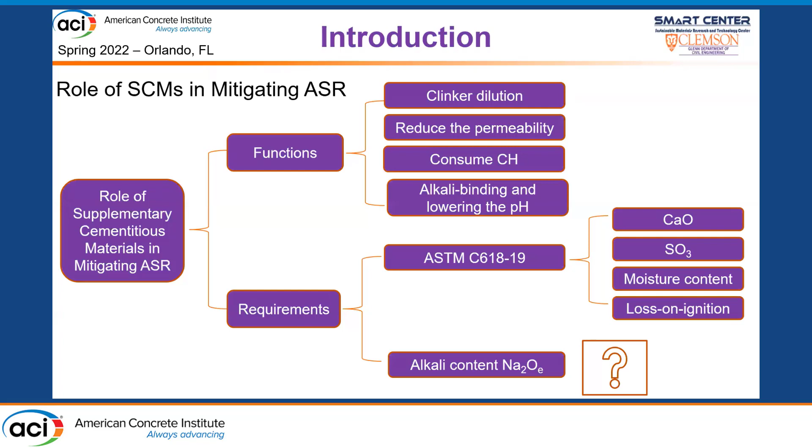ASTM C618 gives some requirements about the SCM used in concrete. The standard addresses the content of calcium oxide, sulfate, moisture content, and loss on ignition. But right now, there is no clear definition about the alkali content of SCM used in concrete.

Previous studies didn't recommend using such SCMs in concrete because they believed that if the SCM contains significant quantities of alkalis, these could also be released into the concrete pore solution, which would increase the challenge of controlling ASR. But the reason why we should investigate HANPs is that the demand for alternative SCMs in the concrete industry has increased significantly.

Generally, SCMs with total alkali content in excess of 3 to 4% are considered high alkali, but not all alkalis are available to participate in ASR. In the XRF data, the alkali content usually means the total alkali content, not the available alkali content. So it's important to distinguish the available alkalis from the total alkalis in the SCMs.

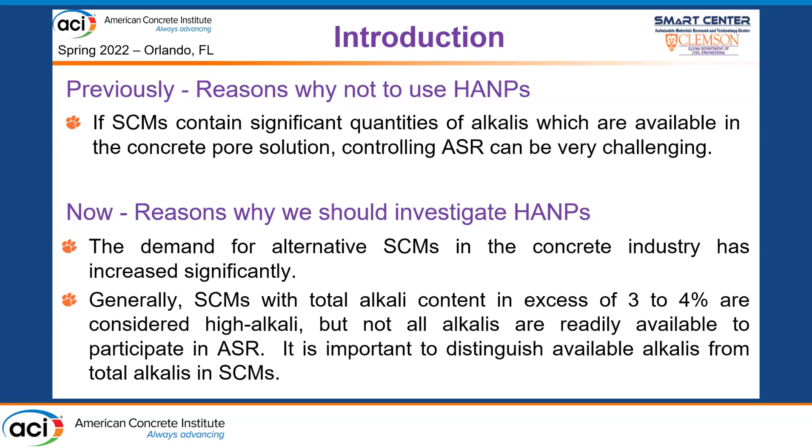So these are the three primary methods we used in our research: ASTM C1567, the accelerated mortar bar test; ASTM C1293, the concrete prism test; and AASHTO T380, the miniature concrete prism test. The three methods have different durations, sample sizes, materials, and exposure environments. Of course, the criteria for effective ASR mitigation are different.

For C1567, the average expansion of the samples should be less than 0.1% at 14 days. For C1293, the average expansion should be less than 0.04% at 2 years. For the MCPT, the expansion should be less than 0.02% at 56 days. After 56 days, we address the expansion rate, which should be less than 0.01% in 2 weeks between 56 days and 84 days.

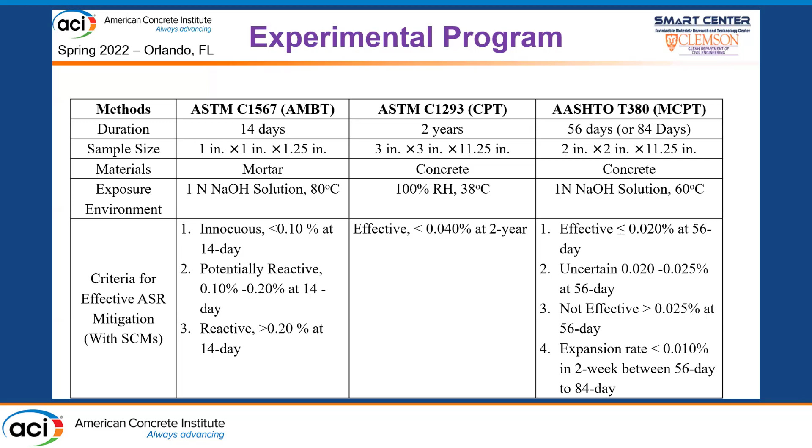The primary advantage of the MCPT compared to the CPT is that it's really short in time, because the CPT needs 2 years to get results. But for this method, we only need 56 days and 84 days to get results.

So this is the XRF data of the materials we are going to test in our research. We have 8 different materials. 2 of them are reclaimed fly ash, labeled NP2 and NP8. The alkali content in the red column is the total alkali content. I hope everyone can remember this value of the NP2 reclaimed fly ash at 4.74, which is the lowest value among all the materials.

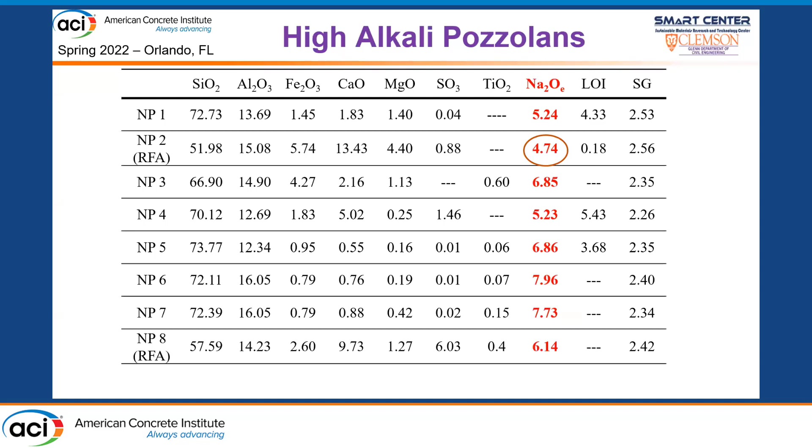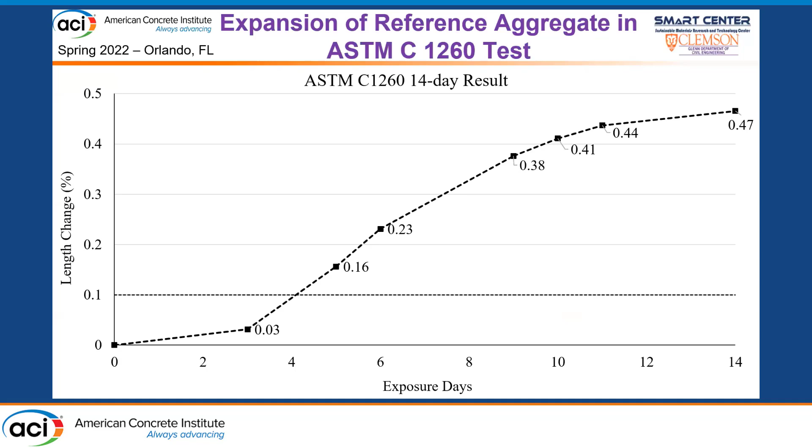So the first step of our research is to use ASTM C1260 to evaluate the reactivity of the aggregate we were going to use. At 14 days, the expansion had already reached 0.47%, which is very far away from the limit line at 0.1%, which proves this aggregate is very reactive for ASR.

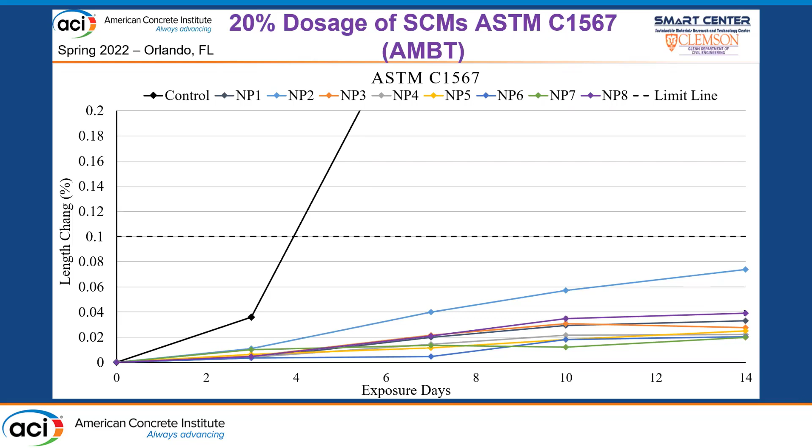And this is the result of a 20% replacement level of SCM in the C1567 AMBT test. In order to show the results properly, the y-axis bound is a little different from the previous figures. You can see the control black line is already out of the figure. All of the materials passed this test, but NP2 is the worst one compared to the rest of the groups, and it continues to expand at the 14th day. So this is the same replacement level in the C1293 test.

Different from the previous figure, the majority of the materials have already failed, except the NP6 and the NP5. Because the requirement for the 1293 is 2 years to get the final result, the test is still ongoing. The latest data we recorded is 1-year data. It still takes some time to get all the data.

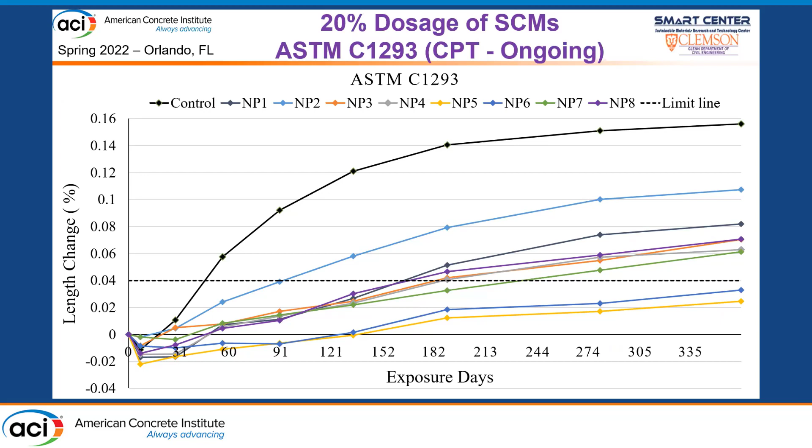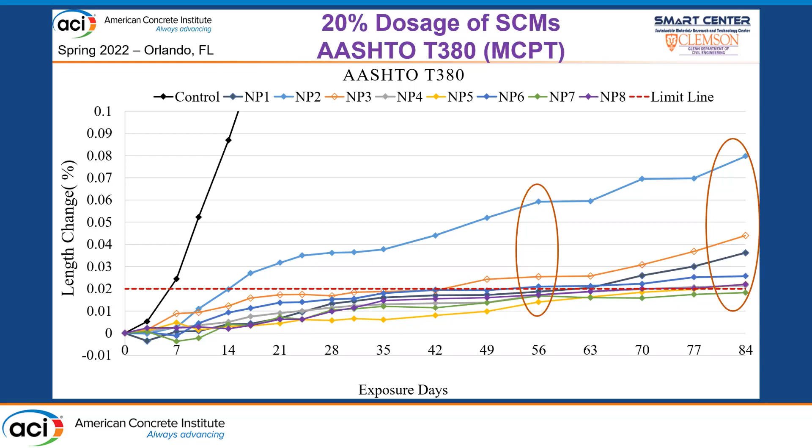And for the T380 MCPT, we evaluate both the 56 days and 84 days. For the 56 day, we focus on the threshold value of 0.02%, so most of them succeeded. But for the 84 days, we focus on the expansion rate between the time interval from 56 to 84 days.

So you can see that I use a blue color for the NP4, NP5, NP6, and NP8, which means although the expansion has already exceeded 0.02% at 84 days and we generally consider it failed, the average expansion rate is less than 0.01% in 2 weeks. So we still consider them effective in mitigating the ASR. We need more research to get a comprehensive result for this kind of material.

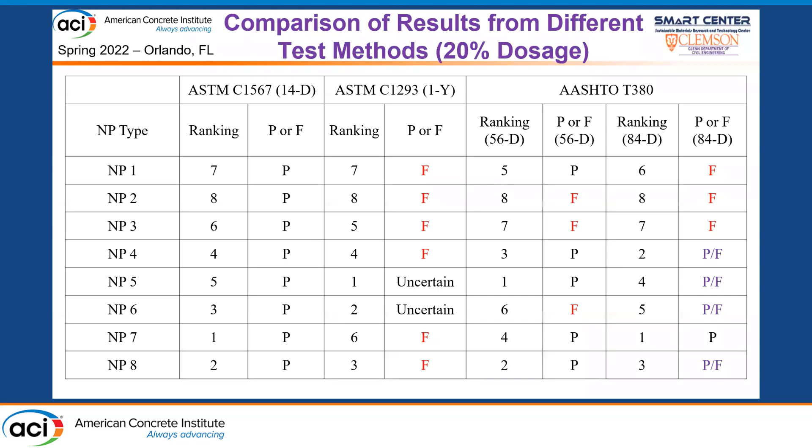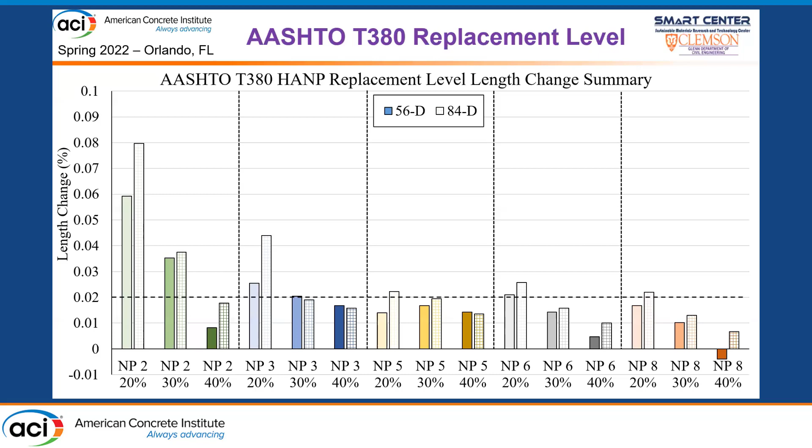And it is very obvious from this result that a 20% dosage level maybe is not enough for controlling the ASR. So we also selected 5 of them for the replacement level test. We increased the SCM replacement level from 20% to 30 and 40%. It is very clear that when we increase the replacement level, the materials effectively mitigate the ASR. For example, NP2 is the worst one compared to the rest of the groups, but when we increase the replacement level to 40%, it successfully mitigated the ASR.

And this is a preliminary study on the pore solution of the paste. This is a very preliminary result we got from the paste pore solution. It indicates the potassium concentration in the pore solution, which is very consistent with the ASR expansion: when we replace the cement with SCMs, the potassium concentration decreased.

And I think you still remember that NP2 is the worst one compared to the rest of them, so its potassium concentration is higher than the other two groups we tested. And the NP3 is relatively better than NP2 but worse than NP5, so its potassium concentration is in the middle. But NP5 compared to the rest of them is the best, so its potassium concentration is the lowest.

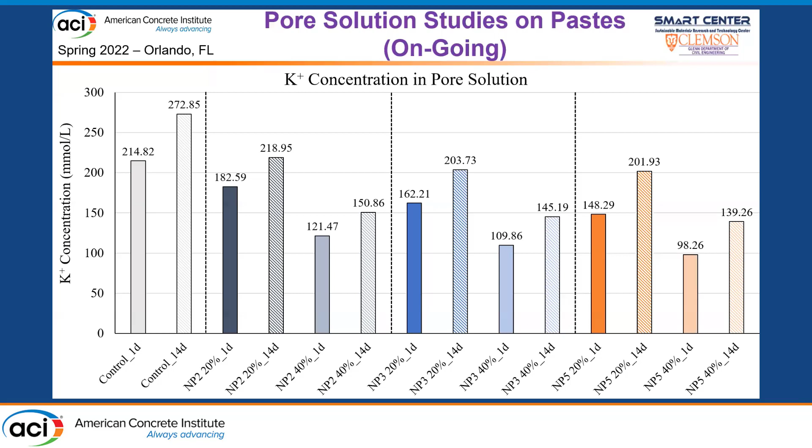So this is my conclusion: compared to the control specimens, all the mixtures with HANP reduced the ASR expansion. The NP2 did not perform as well as the rest, but really reduced the ASR expansion even at 20% dosage level compared to the control groups. And different test methods yield different characteristics of the HANPs. In 1567, all of them passed, but the majority of them failed in the 1293 and the T380 MCPT test at 20% dosage levels.

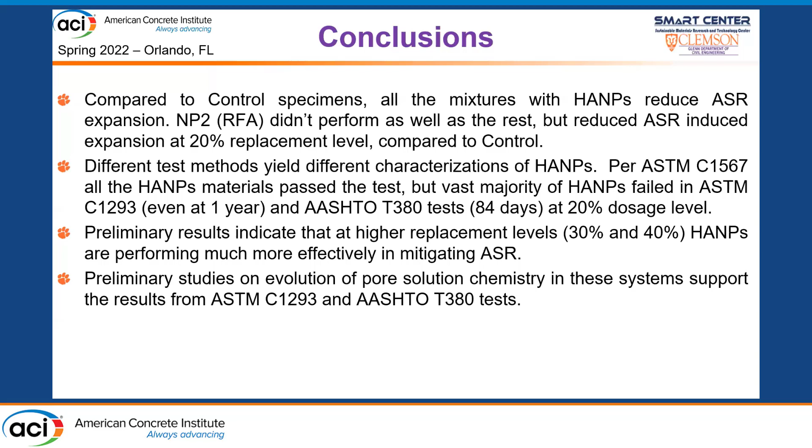And the preliminary results indicate that the higher replacement levels perform much better in mitigating the ASR. And the preliminary studies on the pore solution chemistry in this system support the results from the 1293 and the T380. So in future study, we try to find the correlation between the total and available alkalis of HANPs.

And I hope we still remember the value of the NP2 reclaimed fly ash. The alkali content level is 4.74%, which is the lowest compared to the rest of the materials, but it has the worst ASR expansion of the group. So it's very important to find out the correlation between total and available alkalis.

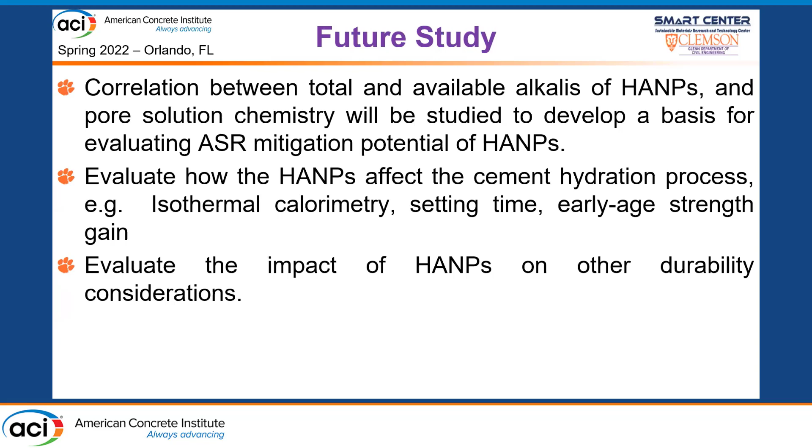And also we need to evaluate how the HANP affects the cementitious hydration process, like isothermal calorimetry study, setting time, and early strength gain. And we need to evaluate the impact of the HANP on other durability considerations like sulfate resistance.